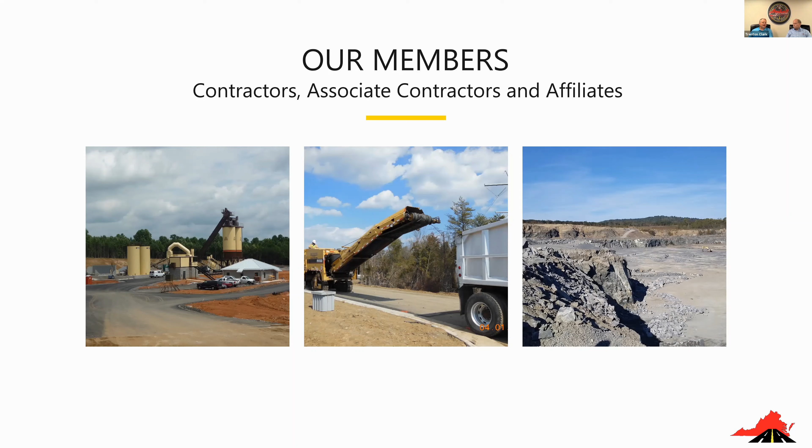Today's topics on asphalt, the ultimate green solution: first we're going to dispel some myths, some fiction that's out there. Yeah, there's plenty of fiction to go around. There's a lot of fiction. We're also going to talk about actually the facts, what studies have been done, how there's a lot of information out there.

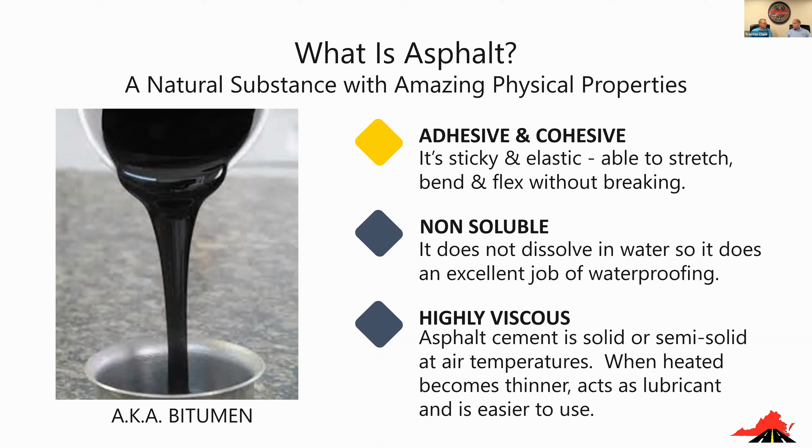It does. Absolutely. So liquid asphalt's been around as long as dinosaurs. It was dinosaurs. Exactly right. You can go to the pitch lakes on the island of Trinidad, and there's some liquid bitumen at that location. And then the La Brea tar pits in California. I wouldn't go sticking my hand in it or anything like that, but they are there even today.

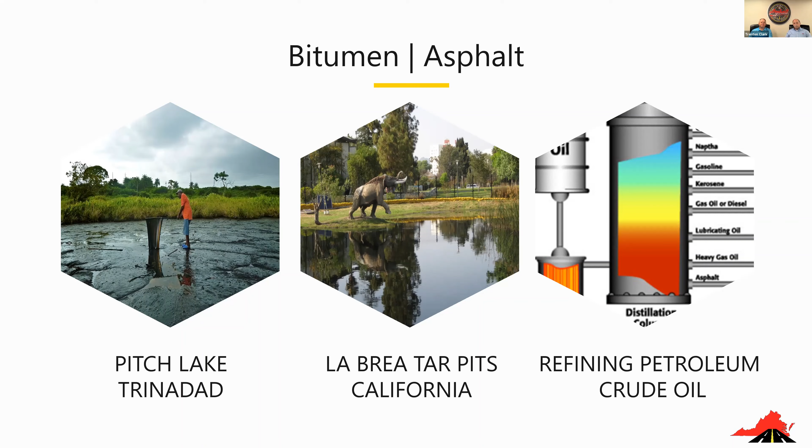But all of our asphalts today come from crude oil and the refining process, just like your gasolines for your cars, diesel fuel, kerosene. In the refining process, it pulls those off. The bottom of that refining process is our liquid asphalts. So it's part of a bigger overall refining process, and we use the asphalt to build our roads today. So really, over the many years I've been in this industry, I've heard really three big misconceptions, misinformation.

It's really been more so in the last 10 to 15 years. Either dealing with the fumes or basically the smell. The smell. Yeah, the smell is a big thing. Everybody's driving down the road and they go through a paving operation. They say, man, that's a strong smell. So we'll talk about that.

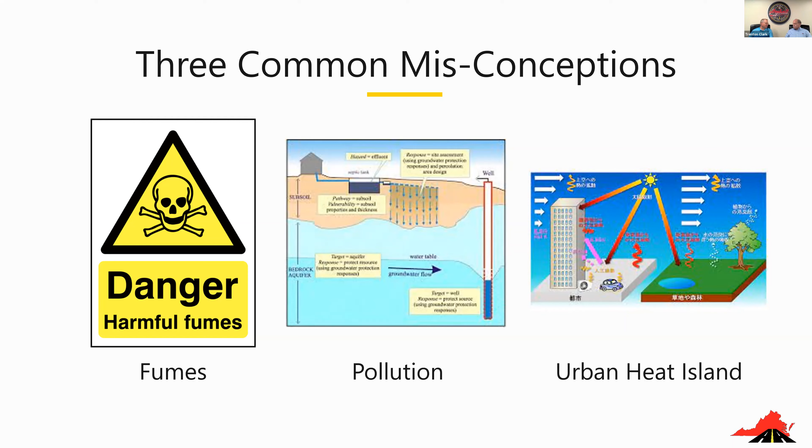We'll also talk about, does it pollute? And a lot of the concerns come around with recycled asphalt pavement. When it's ground up and stockpiled, or it's put down on a driveway, or put down on a parking lot, does it pollute the groundwater? We'll talk about that. And then the last thing, well, asphalt, because it's black, it's what's causing all the cities to heat up, the urban heat island effect, and we'll talk about that.

Well, let's first just really address the paving fume. So whether you are near an asphalt plant, you drive by one, you drive through a paving operation, you may smell a dump truck that has asphalt on it. Fumes are coming, it's just smell. So think of it like I do as a Krispy Kreme donut. Right. You smell the Krispy Kreme, smells good. To some of us, asphalt smells good. Right. But there was concern is, does the fumes cause cancer?

Yeah. So there was a large study started about 10 years ago that looked into that, the fumes from asphalt. Particularly focused on the workers, because they're the ones that are exposed to it the most. Well, the workers are the most valuable asset a company has. Without workers, you don't have a company. Exactly. So they're very concerned to make sure that their workers were protected.

So they went through this international study, looked at all the known data, gathered it all together. There's been years and years of research. And at the end of the day, they determined there's no direct link to cancer from asphalt paving fumes. So what you smell or what those workers are exposed to at the asphalt plant or right behind the paver, they found no direct link.

What they did do is they classified it as 2B. 2B means possible carcinogen. You say, well, it says possible. Again, no direct link. And remember, aloe vera is also 2B. Pickled vegetables are 2B. And unfortunately, red meat is there too. So again, while it was classified there out of the abundance of caution, there's no data to support it.

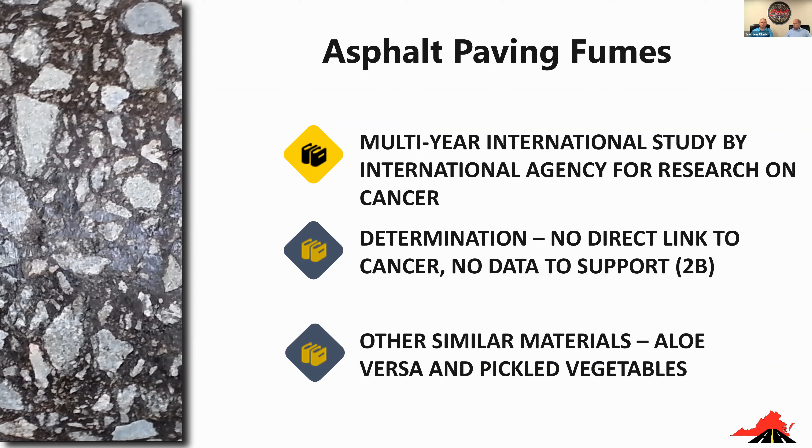So what does that mean? Don't worry about the smell of the asphalt. You may not care for it. There's lots of places we have asphalt plants that you probably don't even know exist. But again, the smell of the asphalt is not a concern. So when we hear it, just wanted to dispel that myth.

Right. The next myth is pollution. That asphalt runs into the groundwater and it pollutes the groundwater. This is a very regulated industry. Just like over on the fume side, we're doing a lot of stuff at the plant, we'll talk about that in a few minutes. We also do lots of stuff around the plant to make sure that there's no groundwater pollution. As David said, it's inert, so it doesn't dissolve in water.

The asphalt plants have to have stormwater prevention control plans. So anything that gets washed off has to be captured. So we have done many things, and a lot of the regulations over the last 20 to 30 years is to make these sites very clean. And even if you see stockpiles of RAP, you may see them along a road, a farmer may use them in the fields, or maybe in a driveway or in a large parking lot.

A lot of that, we've done, again, studies to make sure what may be seen is stuff that's on the pavement, but where do they come from? The drippings of cars. Right. The drippings of trucks. Right. Other things. And we'll talk about ways that can be mitigated today with specialty pavements. The asphalt itself, you don't have to worry about that pollution.

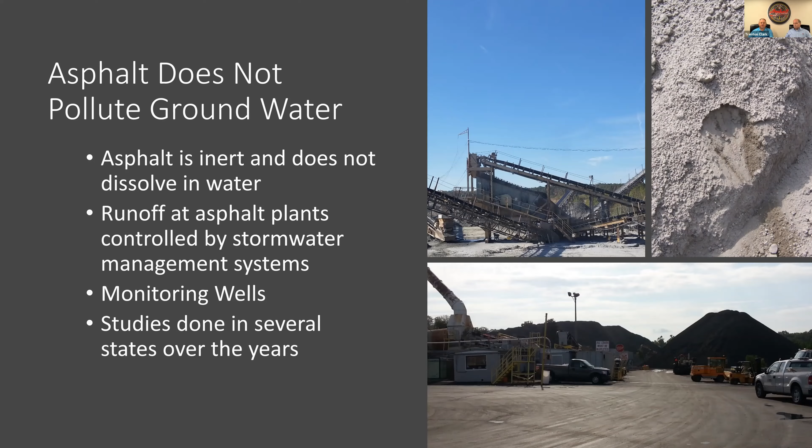Lastly, you hear a lot about this urban heat island. Urban heat island, basically, if you think about it: urban, so we're talking about our cities; heat, we're talking hot; and island, if you think of a big map and your city is surrounded by green, they consider that an island. So it would be crazy to say no, asphalt does not get hot.

Right. The lighter colored surfaces, yes, the surface of it will be less warm, still warm, but less. But what it does is it reflects it. So whereas asphalt is absorbing it and it's going into the ground, the lighter surface reflects it, and it goes into the air.

Also, Arizona State looked at LA's cool pavements, where they did a lot of light colored surfaces. And what happens? It feels hotter to the pedestrians because that heat is reflecting back up onto the folks. So the air around them itself starts to heat up because it's all reflected, as opposed to the asphalt pavement that would absorb some of that heat.

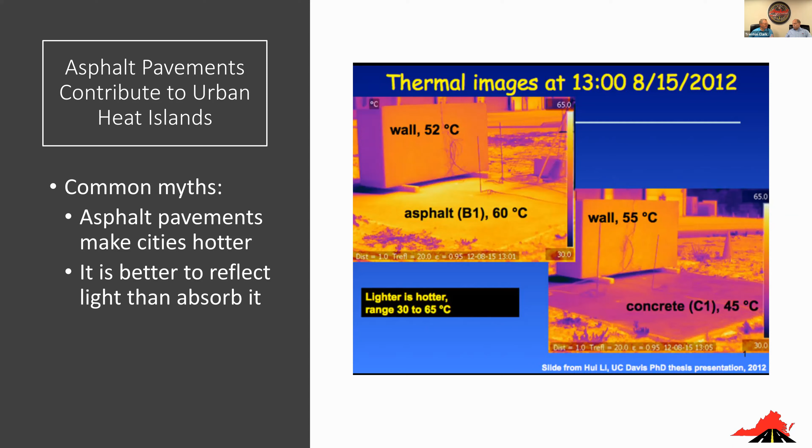When it's hot outside, where do you go looking? You go under a tree, under a canopy, something. You need to go somewhere that is cool. Underneath the trees, it's cool. And they found that having canopies in these urban areas, these trees, to absorb the heat, cools off the city. So it really comes down to having the right trees in your neighborhoods to keep your cities and neighborhoods cool. Right. Absolutely.

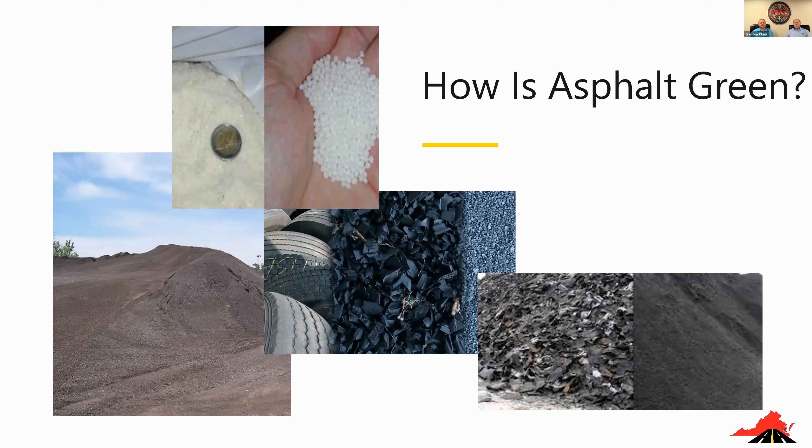So let's talk about how asphalt is green. We talked about a number of technologies associated with asphalt this morning and what asphalt's made of, but how is asphalt itself green? Let's talk about the asphalt plant and the mix technologies themselves. Asphalt plants have been around for a long, long time. And many years ago, a lot of the plants used a lot more fossil fuels for their heating.

They used diesel fuel. They burned used oils to heat those. But today a large percentage, if not most, of our plants use natural gas, because it's available and it's very clean burning, and it's typically more efficient. You get a lot more BTUs out of natural gas than out of diesel fuels. So it is a much better process, not only for the production of the asphalt itself, but more environmentally.

And with these plant technologies, we're optimizing the burners, so more of the heat generated goes into it, to reduce the emissions. They're tuned just like you tune a guitar, to be as efficient as possible. We store aggregates and RAP underneath a lot of canopies, a lot of Quonset huts. Why? It keeps them dry. If it's already dry, you can use less heat to dry out the aggregate, because we don't want to use wet aggregate.

But we also use a lot of mix technologies, such as warm mix asphalt. There are a lot of additives and mechanical processes, such as foaming, that you can use in an asphalt plant, which allow you to bring those production temperatures down. So without those technologies, you may be running your mixes in the 325 range.

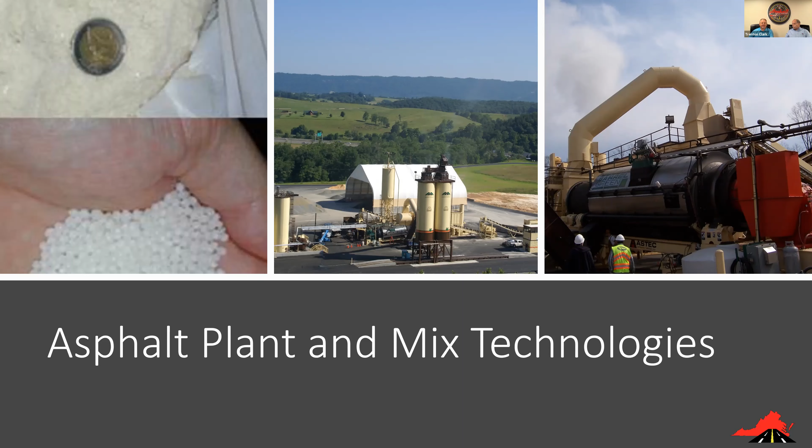So with natural gas, they have a reliable, less expensive, cleaner burning type fuel. The burners are more efficient, more optimized. They're doing more and more to keep that aggregate dry so they don't have to heat it up. All these things just reduce emissions.

Exactly. We also use a lot of recycled products in our asphalt. Recycled asphalt pavement's the #1 recycled material in the world, more so than paper, more so than aluminum cans, more so than plastic, because we can mill those pavements up, process them, and put them in the new mixes.

We also use a lot of shingles. Depending on where you're at in the country, there's more or less. Here in Virginia, less is used because we do have a lot of RAP, but we have to use them responsibly because the shingles on your roof are very hard binding. Right. So you have to incorporate that with other materials, softer binders, different additives, so the mix isn't so brittle that it cracks.

And then we're using lots and lots of tires. Depending on where you're at in the country, there's mandates. Here in Virginia, we've done projects dating back to the early 90s, but it's only been in the last decade or so that we've been using ground tire rubber or crumb rubber in these mixes. So again, one, we're keeping them out of the landfills, but two, just as importantly, it works really, really well. Yeah, it improves the performance of our mixes, so why not use it?

Yeah. We have used glass in the past. We had mixed performance with glass, so you don't see a lot of glassphalt being done unless it's on a small private job. But like all things, more research is going on. We got bio-based binders, coming from other organic materials that are making asphalt binders. So lots of things are going on to recycle materials.

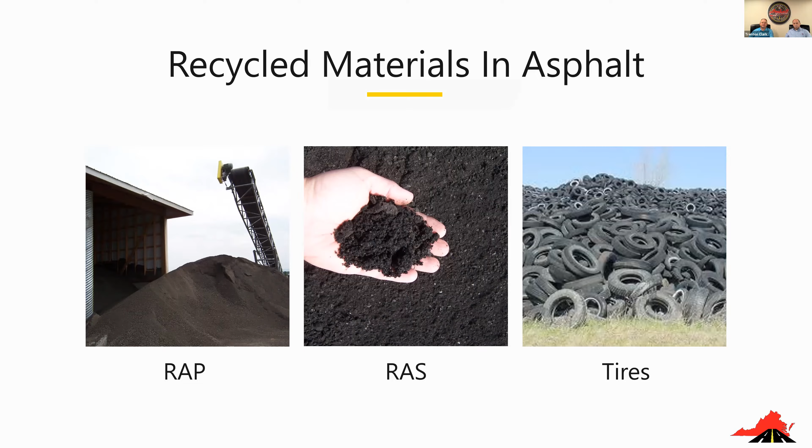Every year, the National Asphalt Pavement Association works with Federal Highway to collect data on how much recycle is being used, how much warm mix technology is being used. And here's just a summary of some of the data from 2019. You can see 28% RAP, pretty much average across the board.

What you need to keep in mind is the amount of RAP that we use in an urban area is completely different than a rural area, because we got much more RAP because we have to mill almost all of our projects to tie into your curb and gutter, driveways, intersecting roads. Mm-hmm. The great thing is that the plants in most of these areas can run 40, some of them now up to 60% recycle when processed properly.

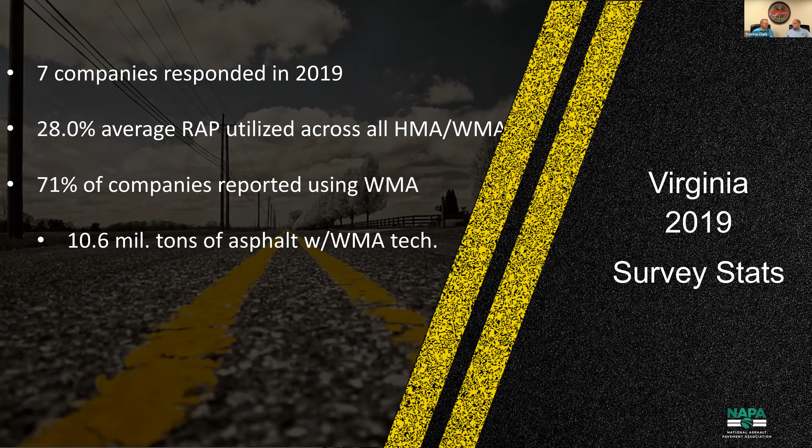The big limitation right now is just specifications. Right. Most clients, whether it's VDOT, Federal Highway, localities, have a limit on how much we can put in. For our private customers, a lot of the members will run, if their plants can handle it, 40-45% RAP, because it is an effective material. It's a well-performing material, and it's really beneficial to utilize that versus bringing in trucks with more aggregate, more binder. Keeping trucks off the road keeps carbon out of the air. That's exactly right.

So let's talk a little bit about that porous asphalt. You were talking about it earlier when we were talking about technologies that are used to control stormwater. And porous asphalt's one of those. So we can take a pavement that's designed to actually allow the water to penetrate through it.

Most of our pavements are designed to be pretty much impermeable, so they allow the water to wash off and go into a stormwater management pond or into a stream or to the rivers. But today's technology with these asphalts allows that water to penetrate through the porous asphalt itself into a drainage basin that can control that water and allow it to penetrate into the ground.

That provides lots of benefits. It's not really a new technology. No, not at all. Been doing it for many, many years in various facets. However, we've modernized our technologies. We talk about some of the polymers that we use in our asphalts. That's allowed us to produce a high performing porous asphalt pavement.

And it allows that water to penetrate into the pavement structure and no longer actually wash off of the road and have to go into a stormwater management pond. You can think about, maybe in your own subdivision, you've got a stormwater management pond that's huge. It has to be able to control a lot of water and then allow that water to sit in a pond. They have to be maintained. They're very difficult. They take up a lot of land. Right. So if you're in an urban area, it can be very difficult to have the proper stormwater management ponds because it just takes up so much land.

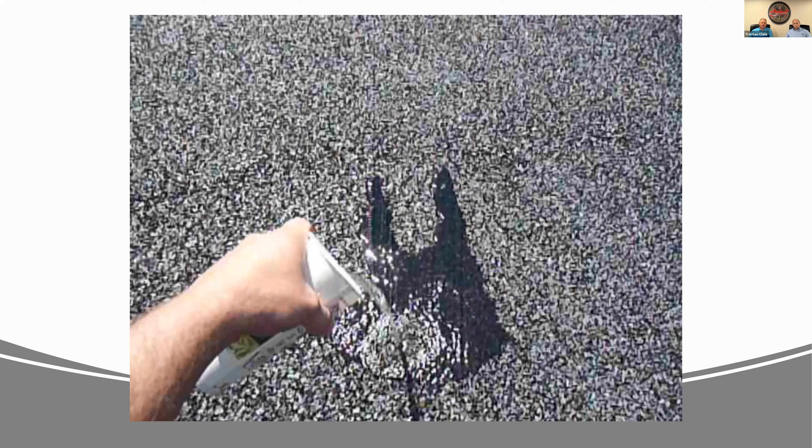Right. What we'd like to just show you real quickly is how the porous pavement works. This is just a video that I captured a few years ago. As you can see, it's just a 16 or 18 ounce cup of water being poured onto the surface. And in about 5 seconds time, the water disappears. So it's not running off anywhere. It's going into the structure. And while we don't normally get a rainstorm that drops 18 ounces in a concentrated spot in about 5 seconds, if we do, we have much bigger issues. But that's how porous pavement works.

Now, the one thing we'll caution you is we get phone calls quite often. I want a porous pavement driveway. Where can I get porous asphalt? We say, you know, that's wonderful that you're thinking of it, but you have to think of the entire system. It's more than just the asphalt. You have to have the stone reservoir underneath of it. It has to be constructed properly.

So the water does the same thing on your driveway. It goes on the top, straight down, and then it sits in that stone reservoir, and then it slowly infiltrates the soil. Right. If it doesn't do that, all it's doing is draining on the top, running out on the bottom, and it's not doing us any good.

So recycling is huge. We've done some of this technology since the 60s. We had to get into recycling, honestly, with the oil embargo of the early 70s.

You remember it? I don't. I'm nowhere near as old as you. Unfortunately, I do. Yeah, you're not that far behind me.

But we had to start milling. Right. Why? Because asphalt itself is just rock and asphalt. Yep. And we were able to utilize that asphalt that was on that existing pavement in the new pavements. Right.

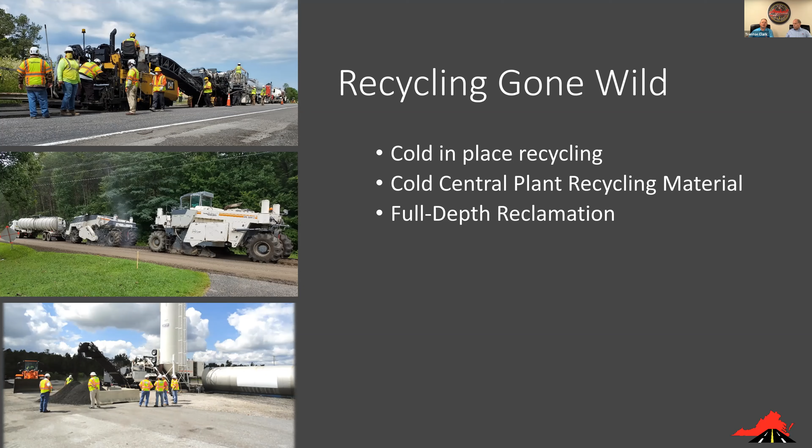All in all, what are we doing? We're reducing demand for virgin materials. We're also reducing the amount of trucking to bring it in, which all in all cleans up and reduces the carbon footprint. So a few things, and then we'll take your questions. Asphalt's green, pavement's green. The technology is green. We're using asphalt pavements today to capture stormwater, to treat stormwater.

The industry itself is very regulated. We have lots of permits that we have to adhere to. The plants get inspected. So we're making sure that the emissions are as low as possible to continue to keep the permits. The companies are the people in your neighborhood. They're the people you may go to church with, or people you see in the grocery store. They have a commitment to be good environmental stewards. Absolutely. Because they're there too. Right. It's their community as well.

Yep. And we've got lots of research underway to see what else can be incorporated. We mentioned plastic earlier. Lots of research is underway to see how we can effectively use the different plastics that are produced, that are now starting to pile up. Starting to pile up, yes. We've got to find ways to recycle those. And there's a lot of research going on to this day to try to answer that question. And if it proves out that it works, guess what? You'll see plastics in our asphalt mixes.